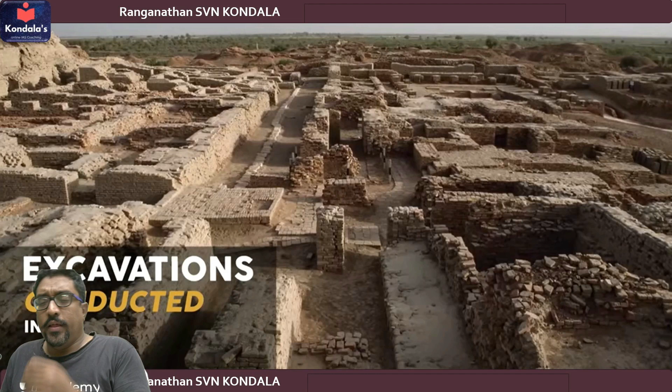Now, the excavations of Indus Valley civilization began in 1920s under Dr. Dayaram Sahni, and eventually Rakhaldas Banerjee continued that, and from there the excavation story continued. There is no stoppage in this. Most archaeologists, most historians are even today astonished at the levels of perfection and architectural excellence the Indus Valley civilization has left us. Even today, they remain a mystery.

Many of the architectural features we see in 19th century to 21st century India have been existing from Indus Valley civilization. Some historians even go to the extent of saying that modern day architecture is nothing but a continual extension of the Indus Valley architecture. The society of Indus Valley civilization existed from 3300 BC to 1700 BC, approximately 13 lakh square kilometers. So there are three types of buildings: public buildings, private buildings, housing complexes. The housing complexes are generally row houses.

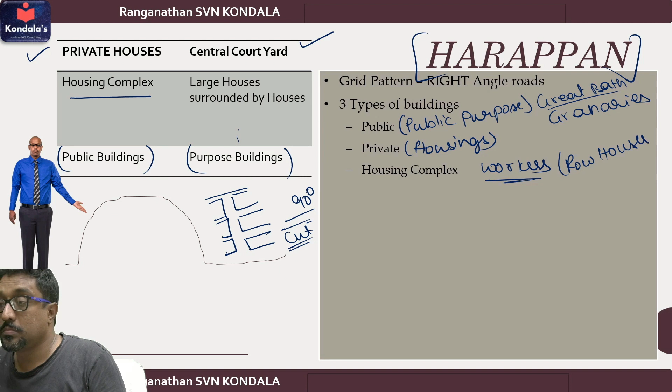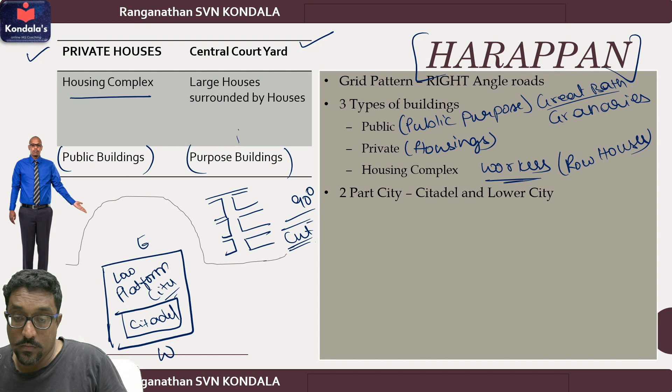Now, apart from this, one unique feature that we observe in the entire Indus Valley architectural style is two-part city. Indus Valley cities are actually divided into two parts. In general, in Indus cities, the western side is always a high mound. It is on a little high platform, and we call this a citadel. The eastern part, low city. Western high mound, eastern low mound. In the west, large buildings, palace type constructions, or even granaries. Granaries are those places where grains are stored, probably for emergency purposes or special requirements. These granaries were constructed on the western high mound.

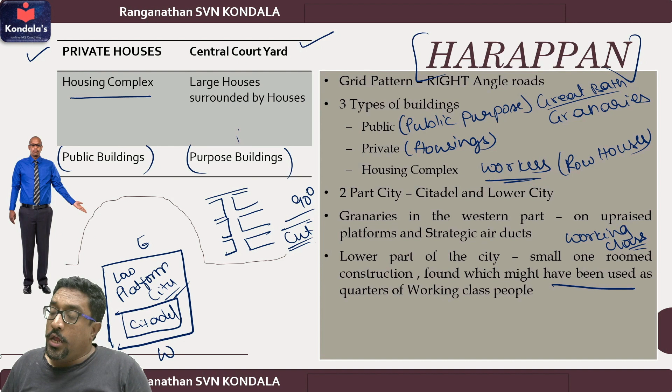Given that western high mound is on a high platform, there will be a lot of wind. So these granaries also used to have air ducts. So people of Indus Valley civilization also had extensive knowledge of storage, of geography, of climate, of agriculture, everything. Because if you store grains in closed rooms, you will always find mold in those grains. Indus Valley people avoided that by building granaries on the western high platform. The lower city used to have smaller one-room constructions, probably mainly for the working class people.

And in all Indus Valley cities, we see a very advanced drainage system, well planned. Every house seems to have been connected to these drain canals. So, since I said east is the low platform and west the high mound, in general, all cities of Indus Valley are in cardinal directions. What is cardinal? East, west, north, south, perfect direction. Enter the city in the east, go to the west. West is high platform, north and south.

And generally, cities were also fortified. They had the practice of fortification. There are some cities which are not fortified. Upper portions of all the cities were fortified, while the remaining parts tend to have less fortification, or sometimes are devoid of forts. Probably lower cities were meant for the masses, and the upper cities on the high platform were definitely meant for the ruling classes. That should have been the reason why they have a two-part city.

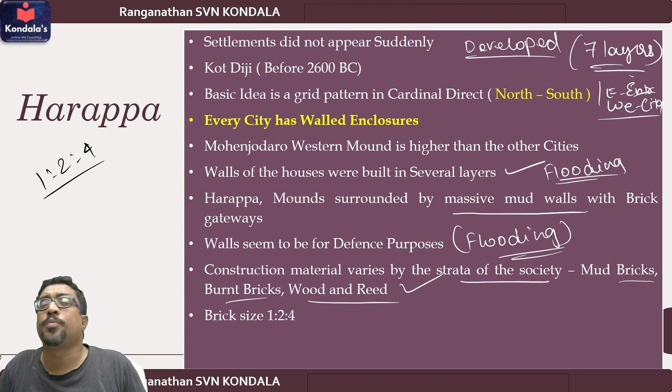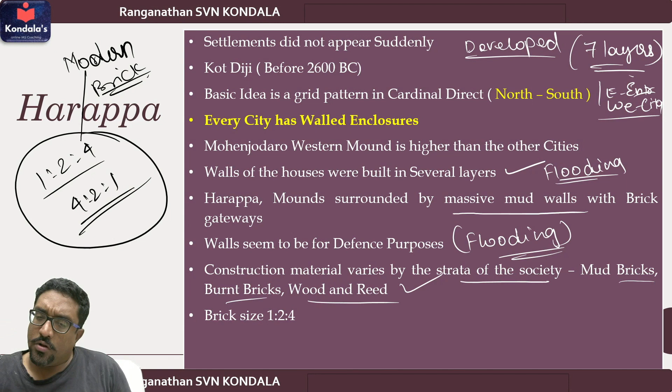And one standard thing that we observe is the brick size in Harappa was 1:2:4. Some books will even call it 4:2:1. Length to breadth to height was exactly proportional. This is even today the dimension that we use in modern brick structures. Present day modern brick structures are also 4:2:1. We still use the same. And the general material in Harappa that we observe is burnt bricks. Some books will also call it baked bricks.

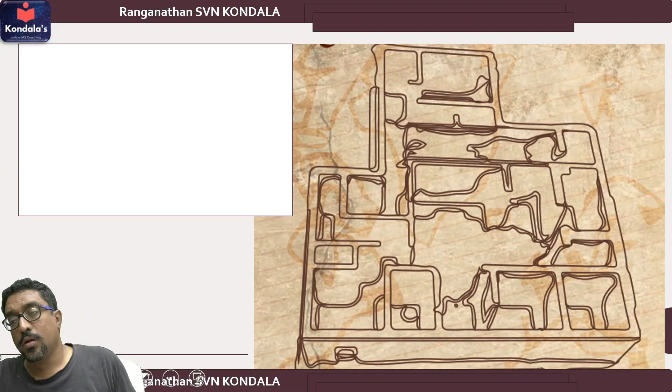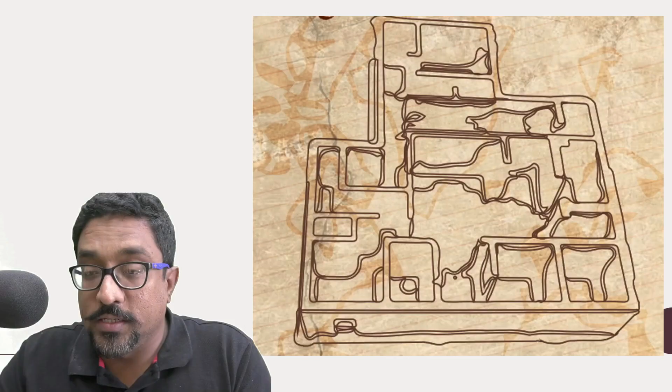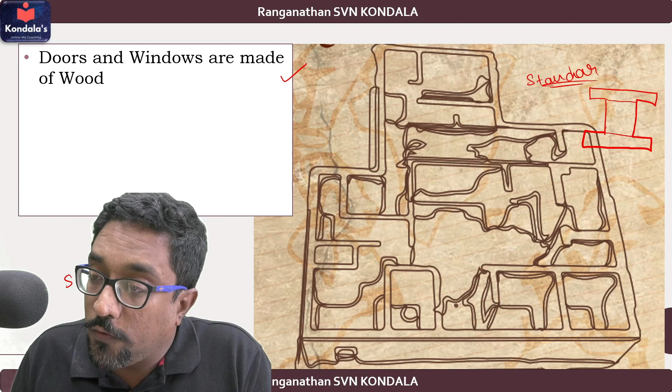Continuing with what we were discussing in the last video, I was giving a quick overview of where the Indus Valley's architectural structures were. Now, when we see the housing styles in Indus Valley civilization, most of the doors and windows were actually made of wood. These were the typical standard wooden structures, just like how we have wooden frames, where the door frame, the door comes like this. It is exactly the same. Nothing has changed from the Indus Valley civilization. It is pretty much exactly how it was.

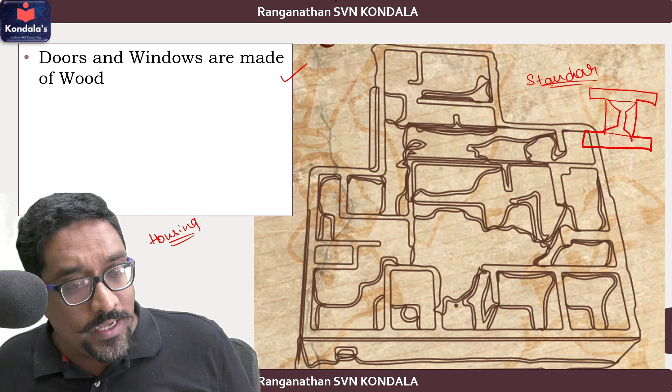The door frames. Now, when we see the housing, one feature that we observe in Indus Valley architectural pattern is the central open courtyard. In all the houses, the middle of the house was open. It has an open roof. This is a typical structure that you see even today in most old classical village houses of India. Sometimes the houses did have a first floor or second floor, and the roof was supported by wooden beams.

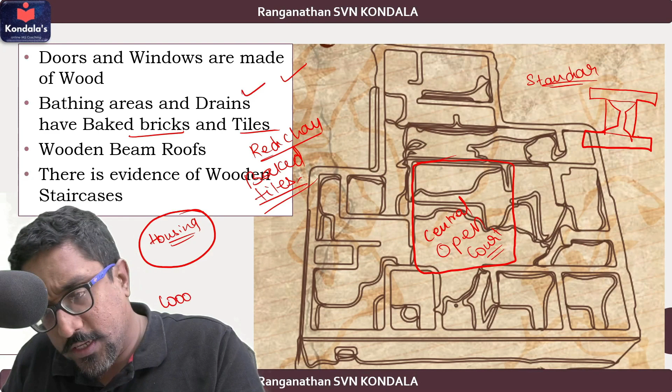And wherever there was water, like in bathrooms, kitchens, the area around the well, bath areas, there were very well planned drains and baked bricks and tiles. Tiles were basically red clay baked tiles. So the typical house structure had a central open courtyard and wooden beams supporting roofs. Indus Valley housing structures also show very clear evidence of wooden staircases. That's why most historians believe that along with baked bricks, wood seems to be the second most important architectural material used.

Some of the recent excavations of Indus Valley civilization have given us interesting insights into the way Indus Valley architecture was designed. A street light system existed. In Mohenjo-daro, on either side of the road, there seem to have been large pillars which had a sort of poles. These may be poles similar to modern day street lights. Street light arrangements were suitably fit for the nights. A watch and ward arrangement was also there at night. Basically, there were these guard tower types. Those also seem to have existed.

So consistently, Indus Valley architecture was very accommodative and comfortably designed to fit their urban planning systems. There were specific places across the Indus Valley cities to throw rubbish and waste materials. They also had well-designed public wells in pretty much every street, probably as water drawing sources. And also a well in every house, for private use. For public use, there were regular wells. All these patterns clearly reveal a well established high sense of engineering and town planning among the people of Indus Valley.

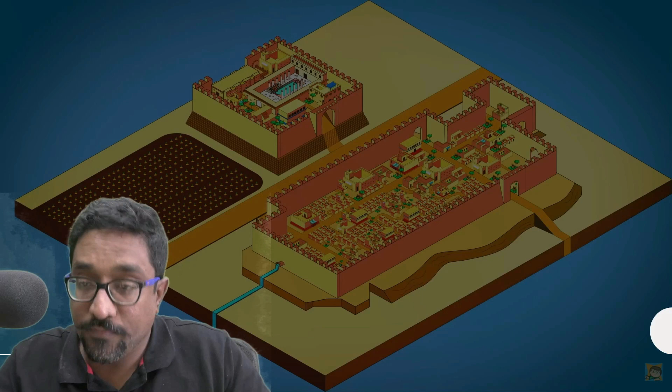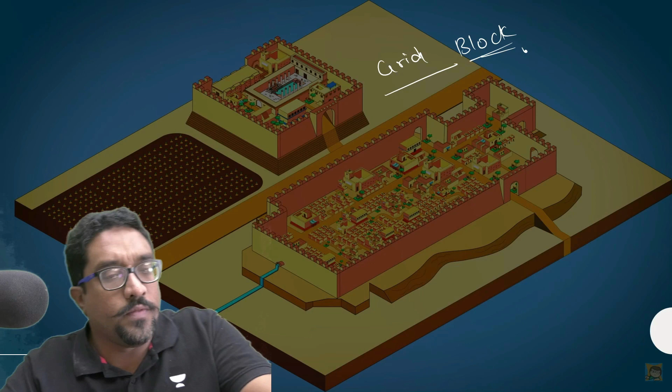The corners of the street were rounded off, perhaps mainly to enable heavy carts to take turns. I'll give an example. If this is the street, these corners were rounded off like this, so that probably they might have had very heavy carts to move, and to enable the movement of these heavy carts, they had these rounded off streets. This is a typical example of grid structure planning and also block planning. Block structure, grid structure of the Indus Valley civilization.

And again, all streets of Indus Valley intersected only at right angles, in a way that prevailing winds could work as a sort of suction pump. Even the street planning was done in such a way that it would create a regular ventilative system within the city structure. No buildings were allowed to be constructed arbitrarily, so everything was planned.

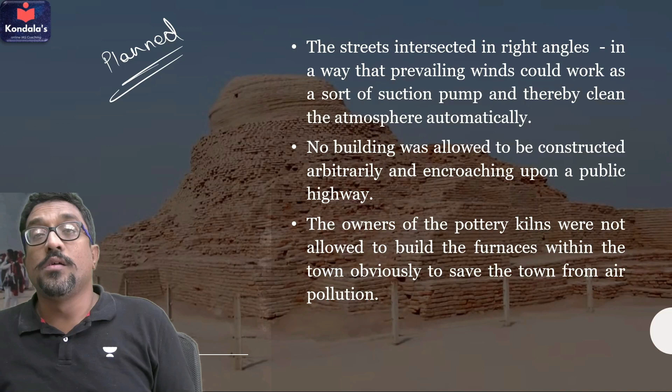Because of this planned layout of all the city structures, there is a theory given by many historians that Indus Valley probably had a sort of municipal government, a municipal structure, where somebody was designing and deciding the rules, and everybody was following them. The owners of pottery kilns were not allowed to build their furnaces within the town, obviously to save the town from air pollution. So those who were involved in pottery, their kilns were kept outside. Brick kilns were kept outside.

The drainage system seems to have been well planned and well managed. At regular intervals, there were 6 feet drain pits, which probably were used for cleaning and maintenance. This is similar to the drain holes we have today. The idea of the drain system, drainage canals, drain cleaning was highly scientific. It had focus on 2 things: hygiene and planning. These 2 things seem to have been very evident in the Indus Valley drainage system.

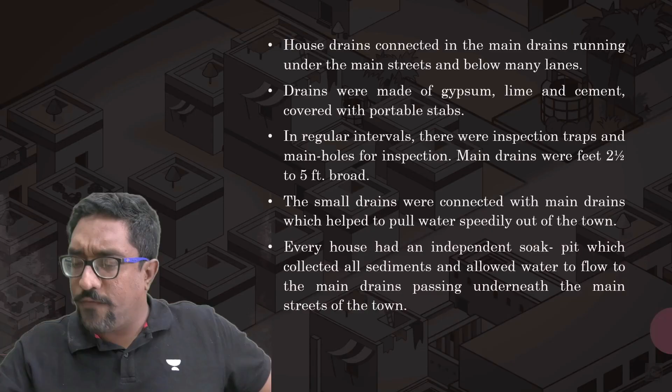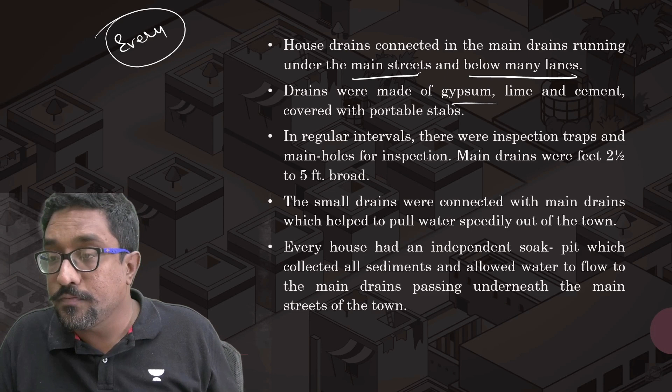The drainage systems of Mohenjo-daro were so elaborate, so scientifically similar to the modern advanced drain systems of today, that it looks as if modern drain structures and modern architecture learnt a lot from the Indus Valley people. Every house was connected to the main drain canal, generally below the main road. Drains were cut into canals, and these canals were then layered with gypsum, lime and cement to avoid water damage. This is something we do even today.

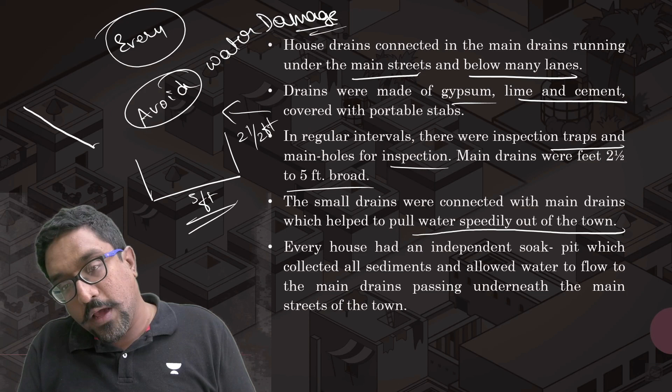At regular intervals, there were inspection traps and manholes. Generally, the main drain was 5 feet broad and 2.5 feet deep. Again, perfection. The small drains were connected to the main drains to carry water speedily out of the town. The drains were kept under the road, so they used the gravity pattern. So this was the main drain, this was the road. Houses were generally a little taller. They used gravity systems to bring the drain water down.

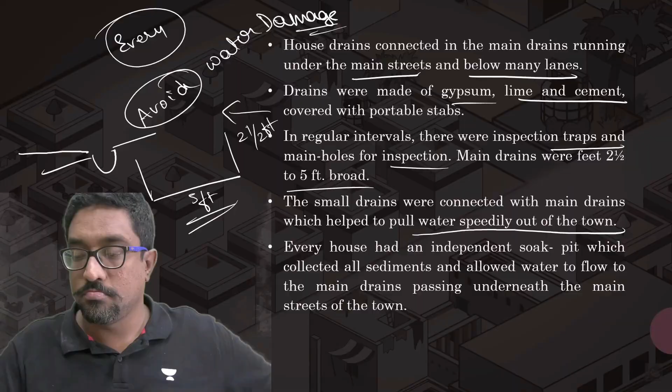House drains connected to the main drains running under the streets. So this is the house. The house is a little tall. From here, you see, there is a canal. The canal would flow like this, and it will fill into this, and this entire thing will eventually go into the main drain. House drains connected to the main drains running under the main streets and below many lanes. Drains were made with gypsum, 2.5 feet by 5 feet.

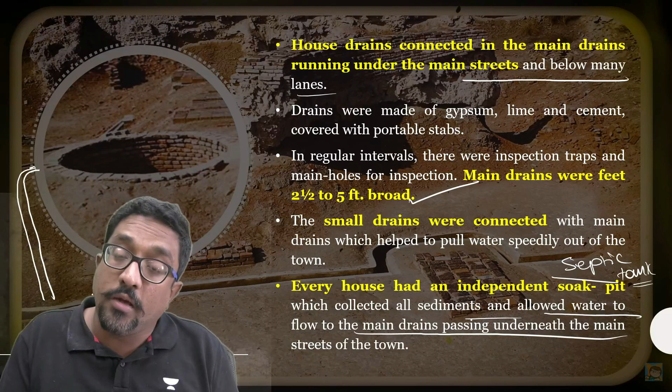Smaller drains were connected with main drains, and every house had its own independent soak pit, like a modern-day septic tank, which collected the sediments and allowed only water to flow into the main drain. Probably they had a modern-day problem like clogging, so to avoid clogging, this was established. Care was taken to ensure that housewives did not throw refuse and dirt into the drains. The extensive drainage system of the Indus Valley proves their very important sense of health and sanitation.

So the Indus Valley house planning structure seems to be a very strong inspiration for modern day house structures and modern day architecture. Modern day house architecture seems to have learned a lot from the Indus Valley civilization.